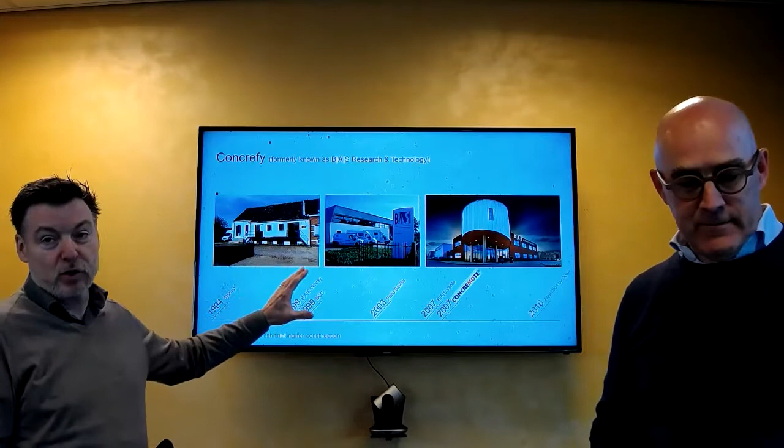Yeah, if you can zoom in. I'll zoom in the presentation. So in this overview, you can see the startup in 1994. I started with a very small lab. In 1999, it grew a bit bigger, and at that time already we had the most modern industrial lab in the Netherlands. And since 2007, we have our lab facility in Venlo. And at this time, now it's the most modern and largest practical lab in the Netherlands, you could say.

I have a small video tour that I would like to give you today, but now we do it virtually. So now you see our premises. This is how our customers and you could enter our building. As you can see here, we have about 3,000 square meters of lab facility. We are very practically organized.

And we have our control rooms where we see all kinds of sensor data coming to us on a global scale, many international projects being controlled by us. Of course, we have a dynamic team where we combine concrete technology, test results, and digital services.

Here you can see a small overview of what we do, all kinds of stuff related to raw materials, fresh concrete, hardened concrete, damage expertise, factory production control. We have all kinds of facilities to do research on all kinds of new concretes, like self-healing, self-compacting concrete, high strength, low strength, and we combine all these things, so testing, consult, and research and development on rebars, fiber concrete, and all kinds of types.

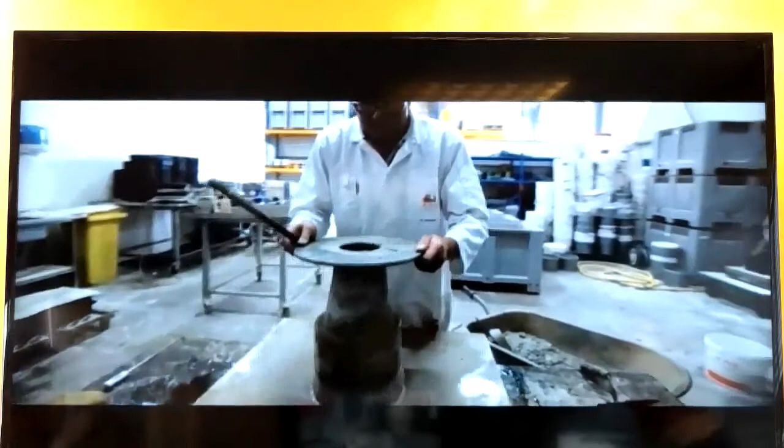And what you see here is an overview of not only concrete technology, but also new sensors. So we develop our own sensors and we connect it directly, as you see in this video, with our daily business and our daily consult and reporting.

And we also consult precasters and building sites. So what you see here is that our people with mobile labs go on site and they check all kinds of factory production control stuff. And we have also very modern test devices for high frequency pulsators, which we use for big dams, for earthquake testing on rebars and couplers.

So, any questions? Because now you've seen the lab, you've been there. We're going to elaborate on it, of course, but do you have any specific questions about what you've seen, or remarks to make? For me it's important that I know what you've seen.

So you see the video right now, there's a time lapse. Is the video just finished? No, we see you now. Okay, yeah, so there's a delay in the line, I guess. Let's see, there's a delay in the live stream, about 20 seconds later. What we see is you live, so we hear you live. Okay, and you see some, okay, well, no problem, we'll try to solve it in a few minutes. If I have a next video, there's only next. Yeah, because it works. But you see me live now. Yeah, we see you, that's one. Okay, this is what we see, great.

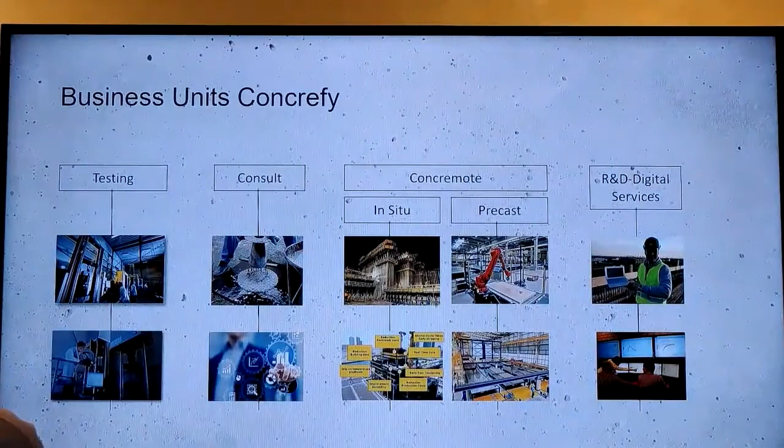Here you see how our company works. So we have different divisions, you could say. The first division is testing. We have an accredited lab in the Netherlands. Accreditation is the highest international standard, I would say, for lab facilities like ours. We have a consult department where our concrete technologists advise our customers, that can be contractors, producers, but also engineering companies and consultants.

And we have what we call a Concremote division. Concremote is real-time measurement with all kinds of new sensors. So we combine sensing and concrete technology, and that's what we call Concremote. Concrete, remote, Concremote. You will hear that much more later on, at least we hope.

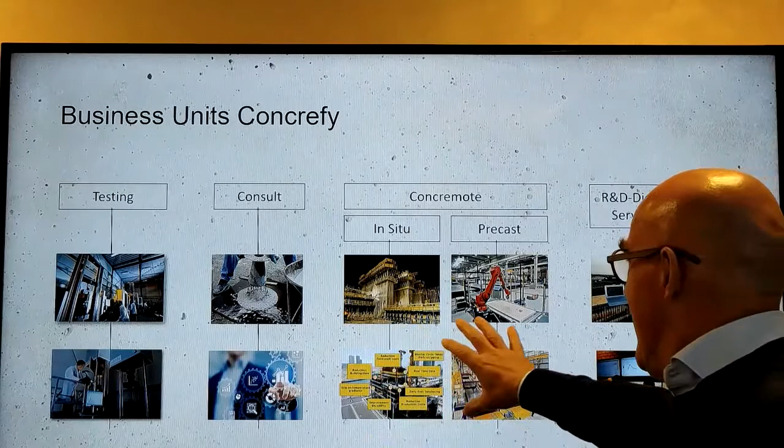Maybe a bit slower than I thought, but so our strategy, our philosophy is that we have sensors on site so that we have real-time information on these building sites and we can help our customer in real time, and he has all kinds of data also available, because that's a problem in our industry. It's quite traditional, old-fashioned, you could say, but we need to industrialize. Our productivity in the industry is very low, it's poor if you relate it to other industries like chemical, food industry, and that kind of stuff.

So that's where, if you connect it to automotive, we have a big problem, you could say. And we think that digitization, internet, industrial Internet of Things, sensing, remote technology, digital services is the solution to bring our smart technology to the industry. So that's what we do here, and we think that the precast industry reflects the industry on site of tomorrow.

If you introduce new technology in the precast industry, then you can export it to the sites. In precast surroundings, you produce under good conditions. You can optimize your production, and I think that in 15 years a production site looks more or less the same as a precast plant today.

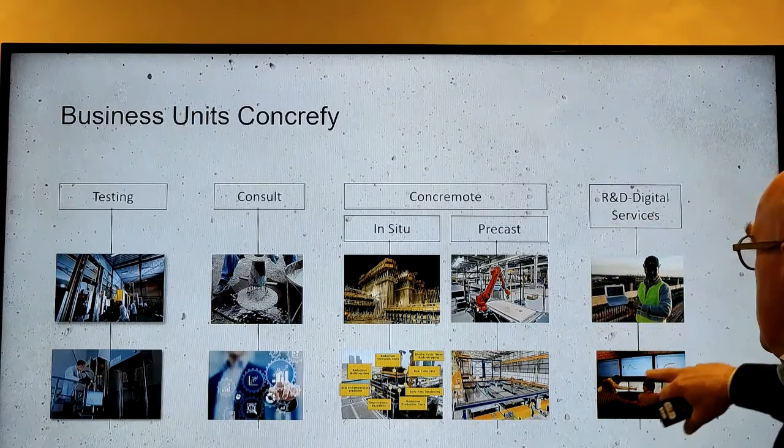And to develop that, we have a department, R&D and digital services. Our R&D people focus very much on the combination of digital services and concrete technology. So here you see the departments and their focuses: research and development, forensic engineering, applied concrete technology, and remote sensing.

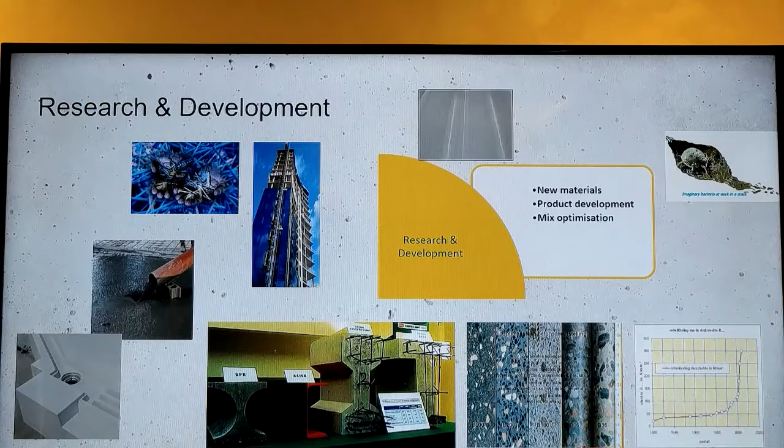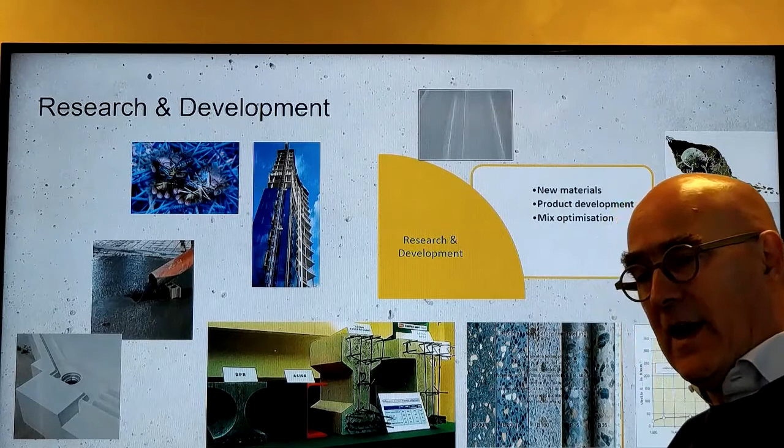If I show you some examples, we focus very much on compressive strength, optimization of the strength, high strength concrete, self-compacting concrete. In the end, we try to help the consultants to reduce the volume of their structures, so that you should be able to produce a concrete beam in the profile of a steel beam. Because if you look at the goals of today, reduction of energy and CO2 is also connected to more intelligent engineering: smaller structures, less rebars, high performance concrete, and process optimization so that you have exactly the right strength, nothing more, nothing less.

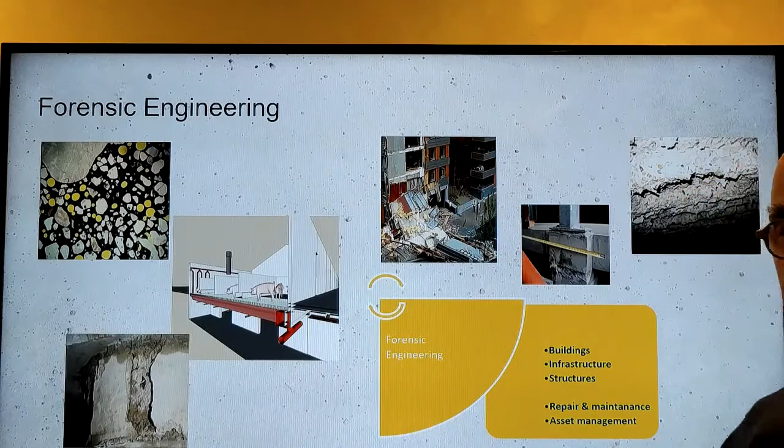Industrialization - we focus very much on that in our R&D. If you look at our forensic department, due to our technology and knowledge of what's happening in the industry, people ask us to help them, to consult them on damages. And we use that experience to improve materials and processes.

So we connect it to our daily business. This is what you see, what we do in normal daily practice. Here you see self-compacting concrete, but we have implemented it about 22 years ago already in about 20 factories in the Netherlands. And today, 70% of our precasters work according to self-compacting concrete procedures, and that's very good on an international scale.

So we are very - you mean we in the Netherlands? We in the Netherlands. So the Dutch industry is very well developed regarding self-compacting concrete. And if you go to Germany, only 4 kilometers away here from Venlo, nobody does it, at least just a few. So cultural stuff, cultures in countries, are very important in whether they adopt, adapt and improve this kind of technology.

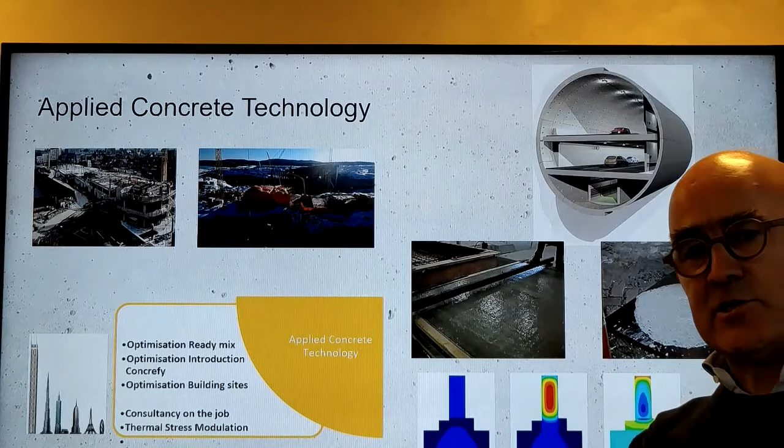The Dutch people in our culture are quite open for new innovations, and as soon as we have a certain understanding of it and some trust in it, we immediately implement it in the industry and just learn by doing. In Germany, people focus on standardization, all kinds of procedures, and then they start to implement. But as you can see with self-compacting concrete, it can last for more than 20 years, and that does not fit in our modern philosophy regarding innovation.

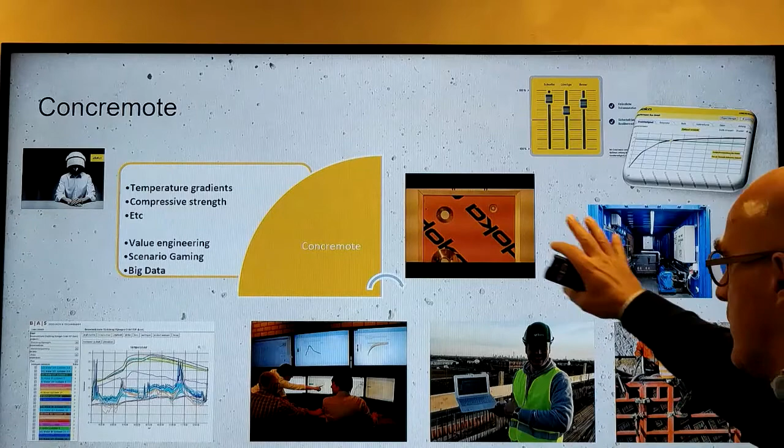Concremote, as I said, is the combination of daily practice, concrete technology, and real-time data. Having the data means that you have control, and that means that you have at least the opportunity to improve.

And that's more or less our company. So then you ask me, how do we? Well, then I first ask everybody who's looking at us, if you have any questions, are you still with us? And it's understandable if you don't want to speak up in this group. We are still here, I have a question. Yeah, that's a good start.

So I understand that you do all the testing, you do the consulting, and you help contractors with projects. That I understand, because you can immediately send an invoice to them. But how do you organize the developments? Because that's a challenge, I think, for the new developments - who is going to pay for that? Because that's you have to do on your own.

It's one of my goals for today, because most of the people are quite young and in the beginning of their career, still theoretically oriented. I started like that too, of course, 26 or 30 years ago. But it's my goal for this company to improve our industry, to make it better, faster, cheaper, with a higher standard, to improve society, etc. But it's quite difficult in our industry because everybody in the R&D sector is focusing on quite reactive responses to the industry.

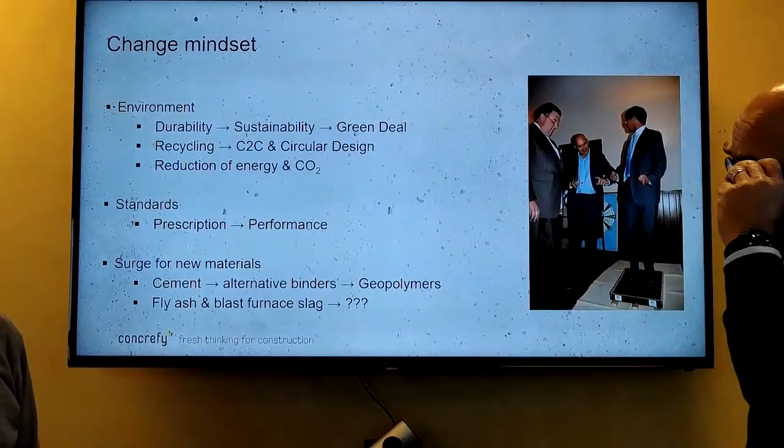There are some important changes going on in the mindset. If you look at the environmental paragraph, we don't talk about durability anymore. We focus on sustainability and even green deals on a global scale. And that's the higher goal, I would say. We don't talk about recycling, we talk about cradle to cradle and circular design. And we try to reduce energy and CO2.

This month in November, the Concrete Society organizes a concrete event on a digital standard, and we have four topics: circular design, urbanization, CO2 reduction, and energy reduction. That is really important to our industry.

But to go into this innovation, we must adopt prescription to performance. So it doesn't matter how many kilograms of cement, sand, or gravel you use, or how your mix looks like. What is really important is what the performance is for the customer. And that is my career, and that is what Concrefy focuses on.

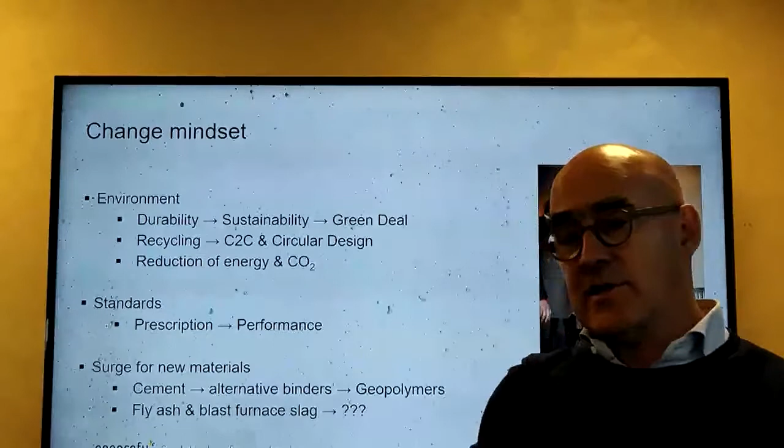Of course, we do research together with universities, and we try to collaborate with them. But we focus very much on the transition to applied technology to make sure that my customer has a certain performance. And that's where the combination between our people and you can be very dynamic for the future.

I think that we have to go to open source collaboration on these kinds of new topics. And in the industry, some companies are already doing this, like Voorbijbeton, Van Wijnen, who are customers of ours. They really want to open this up, like we did 20 years ago with self-compacting concrete, with people and companies working together. And we have to look for new materials.

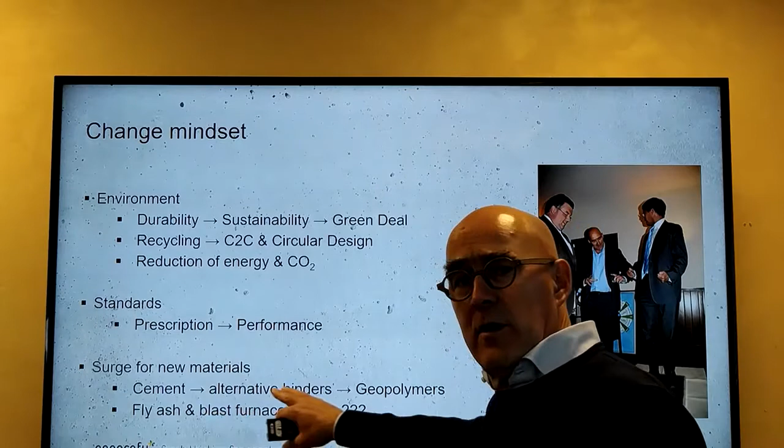Cementitious materials, I think we have to change that. So we have to go to alternative binders, like we discussed today, geopolymers for instance. But we have a problem on the way up, because we will have less fly ash, less quality of fly ash, and also less blast furnace slag cement, because the other industries are also improving. So we have to be very creative in the future to develop all kinds of solutions.

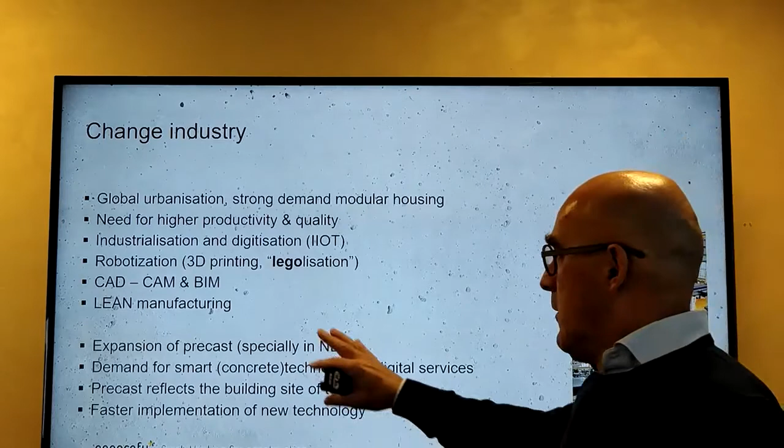And our industry is changing. That means we will have global urbanization. We need higher productivity, a higher standard of industrialization, CAD/CAM and BIM. Our precast industry will expand on a global scale very fast, because that will be the standard for the future. If you want to develop pricing, productivity, and speed, then you really need to go to precast. So there's also a very high demand for smart technology combined with digital services.

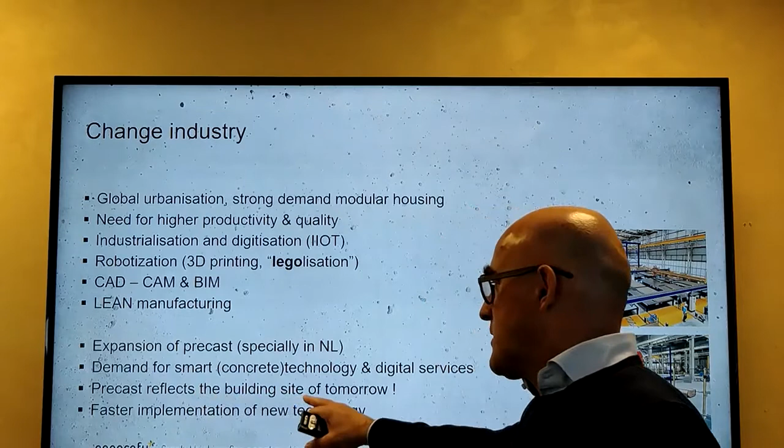And that's where we focus, and that's where we need intelligent people and research to make that happen. Because, as I said, precast reflects the building site of tomorrow. And we think that you can no longer focus on standards, because they are based on historical technology.

We have to implement in a new way, like design by testing. And that's where our lab comes in. If you really want to focus on design by testing, universities like TU Delft and Eric with his staff, we have to focus on new implementation, learning by doing, you could say. So that's Dutch style, and it has to be faster, of course, than it used to be.

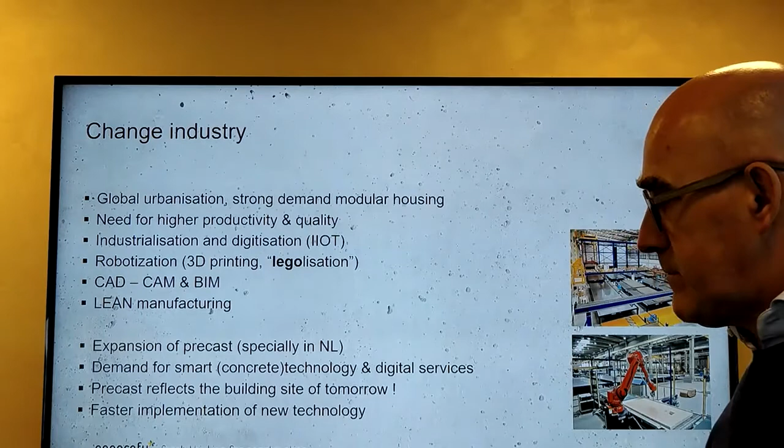The development time that we had 20 years ago is no longer there. Every year you get a new smartphone, new developments. Implementation of new technologies goes faster and faster, so you can't wait until standards are changed. Doesn't work anymore. My personal idea is that if you look at European and international standardization, I see more or less a standstill coming.

People, companies no longer want to spend their precious time in procedures that last for 10 years to come up with a new standard. It doesn't make sense, because our economy develops much faster. The way you as students absorb all kinds of new technologies, the speed, the acceleration with which you can generate new technology, it doesn't fit in standardization.

So I would say forget standardization, trust yourself, trust your new technology, and try to convince people on a scientific way, of course, of the added value.

Well, you asked for my vision. That's our reason for existence, you could say, our raison d'être in French. So we want to be the concrete specialist as a company, but then in a modern way. The specialist does not mean that I have to know everything about concrete. No, I have to come up with a solution for our customer so that he has a partner, an institute that can help, maybe in collaboration with you, with the university. That's this open source society.

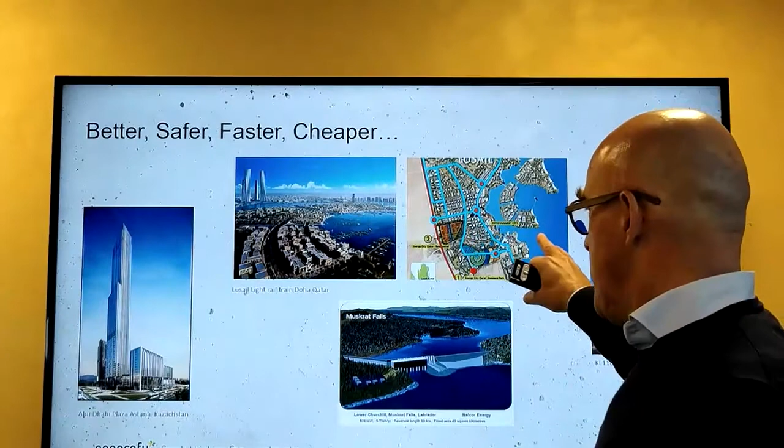And what do we want to achieve? Better, safer, faster, cheaper. You can see here on large projects where we have worked, and we use high standardized concrete technology with real-time measurements to make these kinds of projects happen, and more creative.

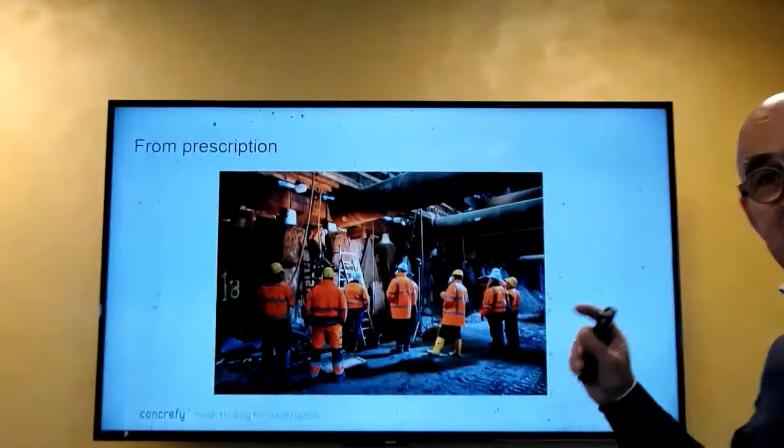I can tell you something about practical solutions, because this is how our industry looks like today. This is a picture of the North-South line, a tunnel project in Amsterdam, only 4 kilometers long. But you see here how the daily business on site works.

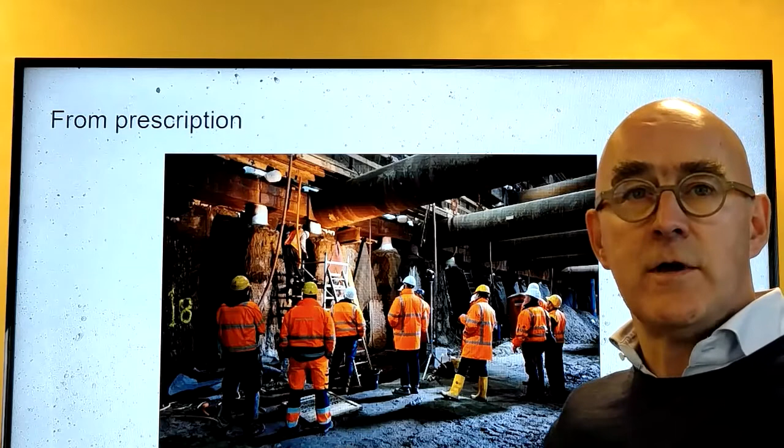There's one guy working, and 10 or 11 people with their hands in their pockets are just looking. Nobody collects data - it's all practically oriented. They go home at the end of the day, and nobody has learned, nobody has improved. The company doesn't have a system or data collected, and they don't have as-built information. So if, after 5 years, you would like to know what happened there, nobody can tell you. That's a big problem in the industry - a lack of digitization.

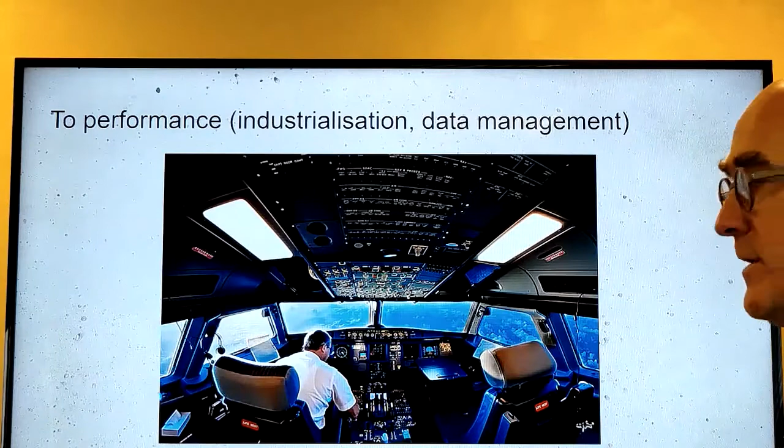So this is where we are heading, and this is our approach. This is how we see the industry in a few years - just one guy having all kinds of sensing devices and machinery available to improve. And we started with this idea.

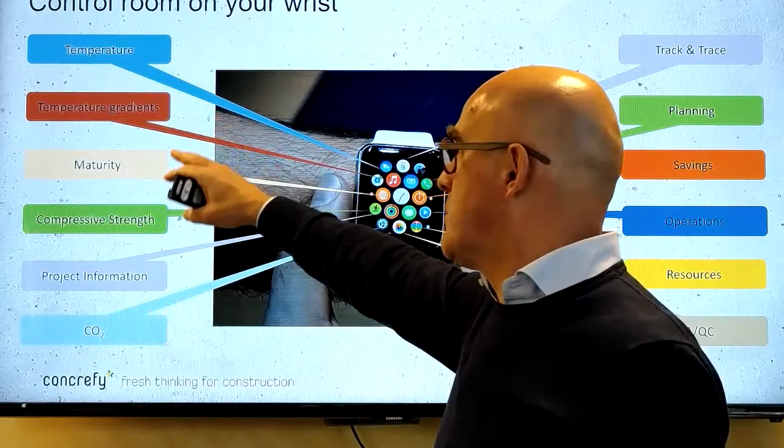So in fact, on a watch on your wrist, you should have an overview of what's happening on site. At one glance, you should have an overview of temperature gradients, maturity, compressive strength, project information, CO2 production, track and trace, your planning, your savings, operational stuff, your resources, and your quality assessment and quality control. We have this technology available because you have all kinds of sensors. IT guys can help you build a decision support tool, as Dr. Blagiewicz calls it - it's just a portal to have all your information on it.

This is the way to control smart concrete in the future, also for repair or self-healing. In fact, on your wrist you should see how your self-healing agent works in practice, so we have to work on that kind of stuff. I think that if we do not develop this kind of technology, concrete will be a material of the past and will not help our society improve in intelligent cities, infrastructure, and buildings.

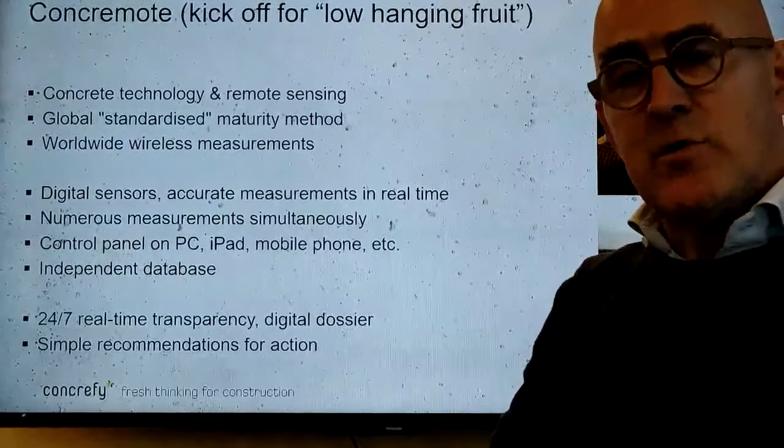I'll go very fast through this one because it's a lot of text, but we started implementing remote sensing in the concrete industry by measuring compressive strength on a global scale in every standard - ASTM, British standard, EN, national standards like the Belgian BENOR and Kiwa. Everywhere you see people focus on the 28-day strength; it's in every standard. But it doesn't make sense, because in the last 2,000 years we've learned that the concrete strength is maybe already at the right target after 2 or 3 days.

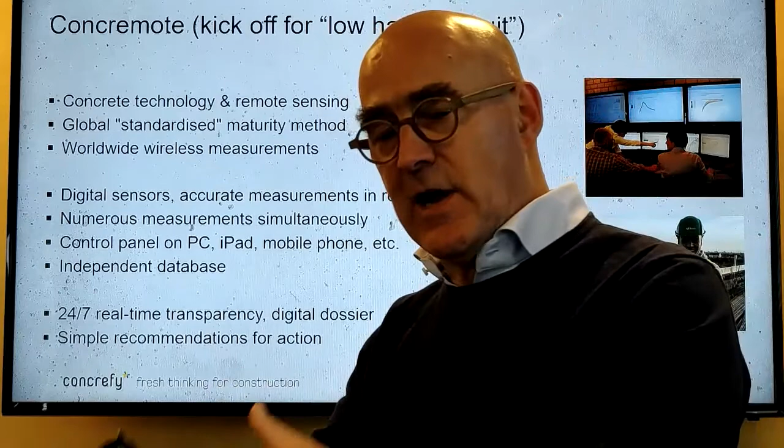So it doesn't make sense to press cubes, because a cube only tells you what the potential strength would be under a certain environment, like water at 20 degrees Celsius. It doesn't make sense. You really have to know what's happening on site, how the structure feels. And the structure can tell you how it feels by sensing—how many cracks there are, or how many cracks have already been repaired through self-healing. Andrea Blagiewicz will tell you more about the sensors we've developed for during service life.

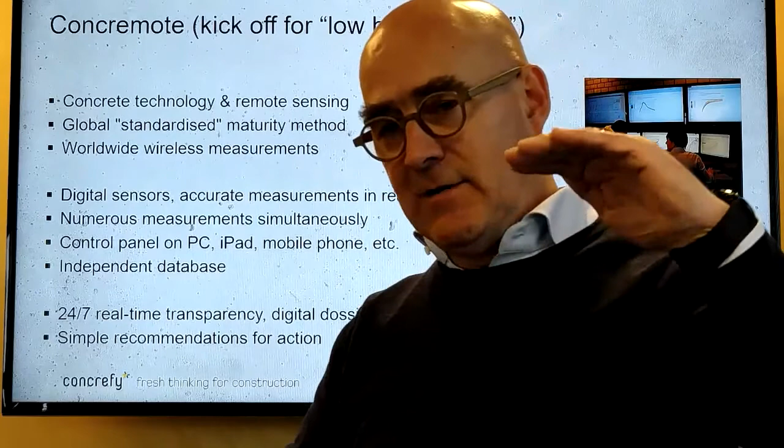But this is where we are focusing. We just started with concrete strength because I know that's the low-hanging fruit for the industry. As soon as we've convinced the industry to adopt this kind of technology, we can take the next step. Coming up with all kinds of smart sensors doesn't make sense yet, because our partners, our clients, aren't that far along. You always have to consider how your customer, your potential user, feels, and whether they're already at the right level to adopt, adapt, and improve.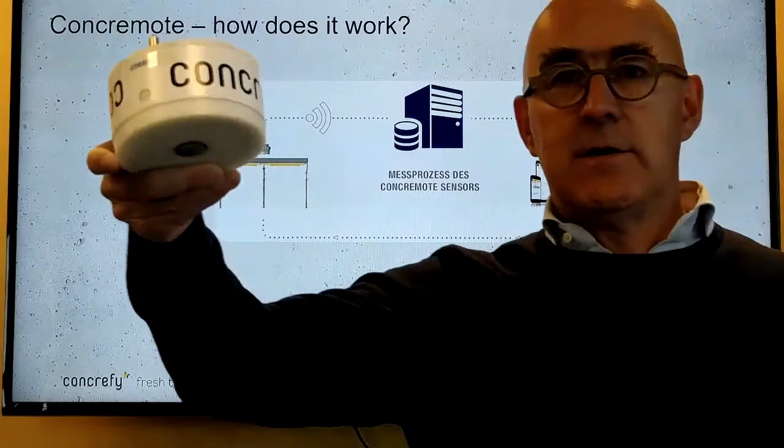Concremote—how does it work? We built a system where you can use a sensor. Here you see a sensor. This is just the size of it. It looks like a teapot. You put it on the surface of the concrete, and immediately you have real-time information.

As fast as I do it now, you put the sensor on the surface, and immediately it tells you, hey, this is concrete, and this is the right strength, and it keeps informing you. At the right moment, it says, hey, you're ready—you can go to the next level, or the next story in your building, or the next phase in your bridge, whatever. So this is just a simple sensor, no buttons, no lights, and it helps you on a very intelligent level deal with your structure.

So you put the sensor on the surface, and like with your cell phone, the signal comes to your computer or your handy, helping you improve.

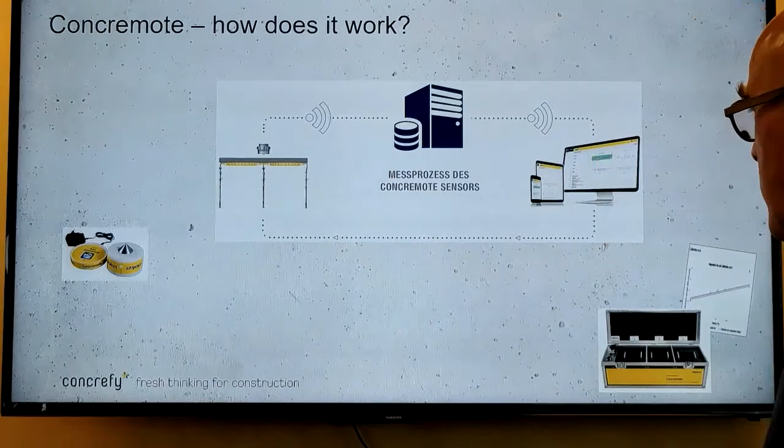The only thing we have to overcome in the beginning is that we need a calibration. So once, when you start, you pour 5 cubes, you press them after a certain time, and during this period of 5 days we monitor the strength development and connect it to the real strength. That's it—you create a fingerprint of your mix. It only costs you 5 hours over a time span of 5 days. That's it, and it's based on this principle.

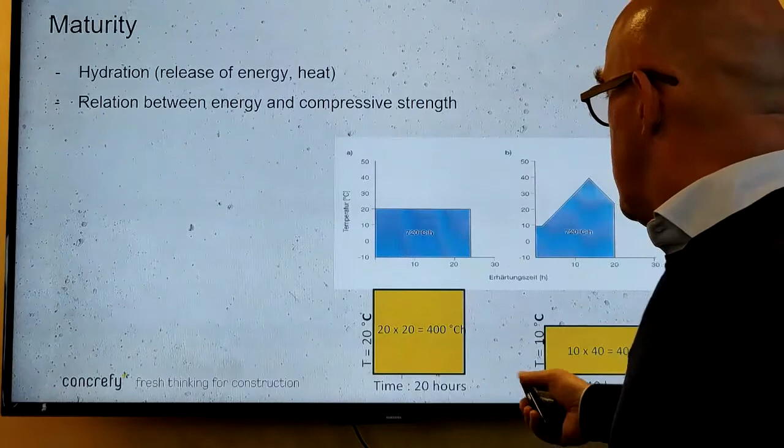Here you see very fast how maturity looks. If you have a certain concrete mix, and the hardening process runs for 10 hours at 10 degrees, 10 times 10 is 100 degrees Celsius hour. It's the same as if you do it 5 hours at 20 degrees. That's the principle behind it.

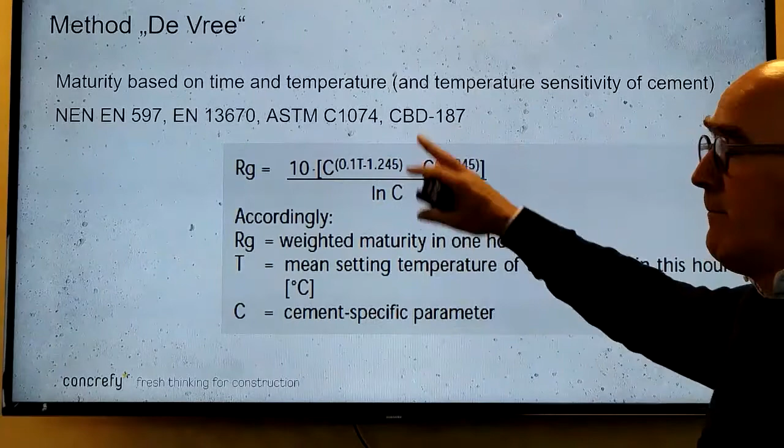There's a more intelligent way of doing it, the method De Vree, but this method is in every standard, ASTM, British standard. So we looked for global acceptance of this methodology, and it's already in every standard, but until today not too many people have digitalized this. We started this 13 years ago, and we are market leader on a global scale just by putting old-fashioned stuff into a new system.

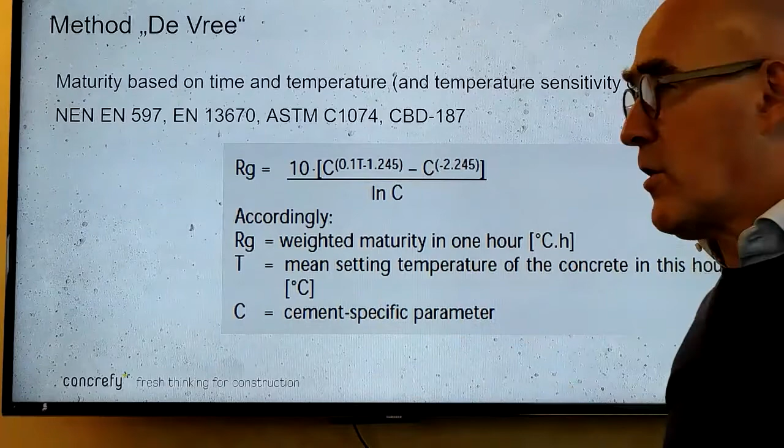And this is what, if you're looking for self-healing structures, you have to do the same—you have to monitor it, you have to be sure it works. You can do that with all kinds of algorithms, knowing your material. What you see here is that the C value of a cement is very important for that methodology. If you really want to know the potential of a structure and what the temperature development is, you have to know what the materials look like.

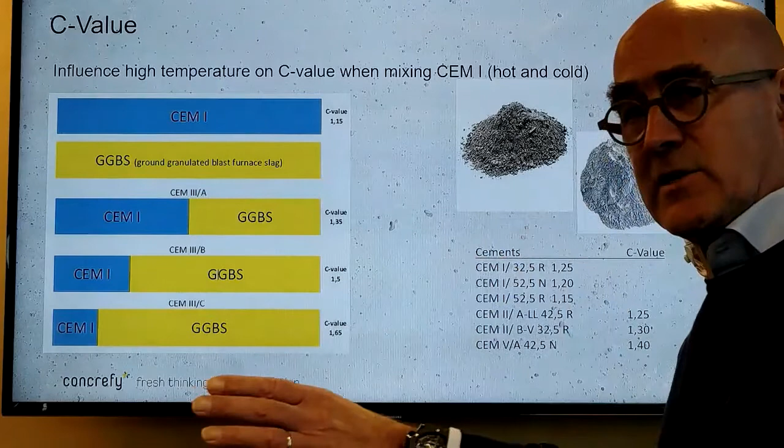Here you see CEM I, GGBS, or combinations. In fact, that means that, depending on the materials, you will have a certain C value between 1.25 and 1.4. So as soon as you know what kind of material there is, you have a certain mix, and once you've calibrated the mix, you have the fingerprint for this kind of measuring. And I'm sure that also in regard to self-healing, there will be such a relation somewhere.

So as soon as you have the relation, you put a sensor in, you can help your customer build up the trust in this new technology.

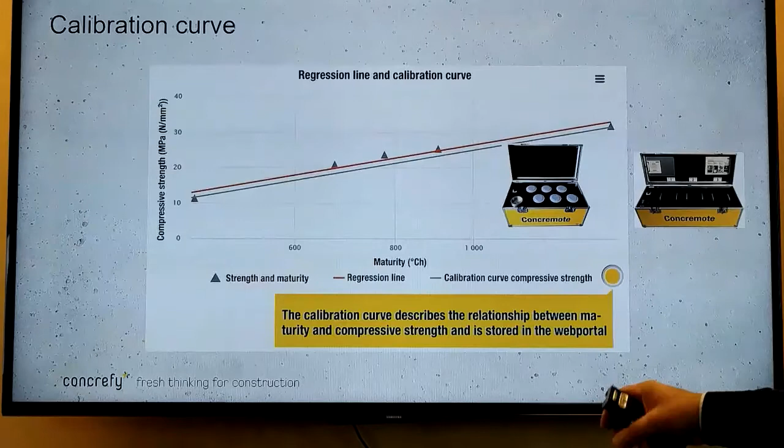This is how this calibration works. We have developed new calibration boxes. We send a box to the customer, they fill it, they press the cubes. Five days later, you have this calibration curve, and that's what we call the fingerprint. As soon as you have this fingerprint, you see the maturity, temperature gradients, and the compressive strength.

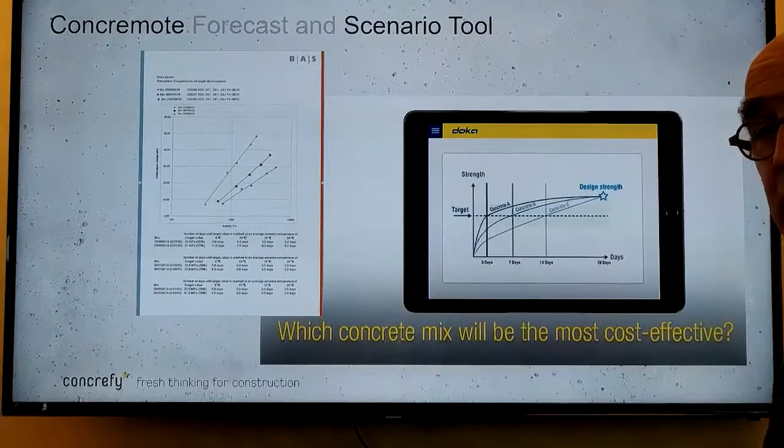And that's really interesting. So real time, people can monitor their structure, can monitor the performance. What you also can do immediately is if you have three types of concrete, A, B, C, a fast one, a slow one, or one in between, you can evaluate what to do on site. Do I need a mix that helps me in 3 days, 7, or 14 days?

Knowing that on a global scale, in 100% of the cases, concrete is too strong, the compressive strength is too high, 100%. So due to the lack of digitization, process control, quality assessment, we don't even know what's happening on site, and we focus on the wrong numbers.

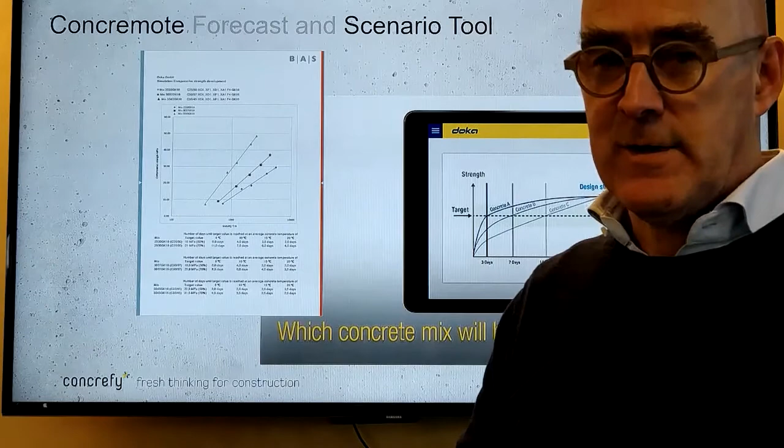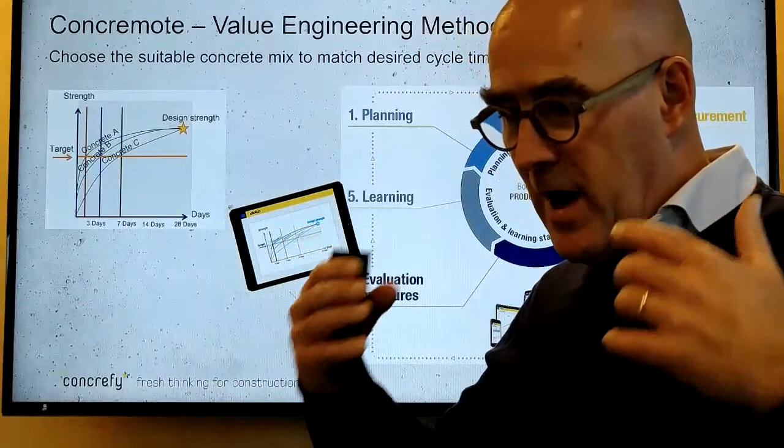Because when you have a high strength, that does not mean that it's improving your structure. Then it's even more brittle than ductile. And I would like to have a ductile material that is flexible and not a brittle one. Also bear in mind that when it's too strong, it's also too expensive, and the CO2 footprint is too high. So what we focus on is use your mindset, look at the industry.

We use a lot of cement, we use a lot of materials. We have to use less cement of a higher quality. We have to engineer structures with less volume of concrete, so the thickness of floors, beams, walls, whatever, it has to be a bit more tiny. Use less rebars, put it on smart locations, and measure continuously from beginning to the end.

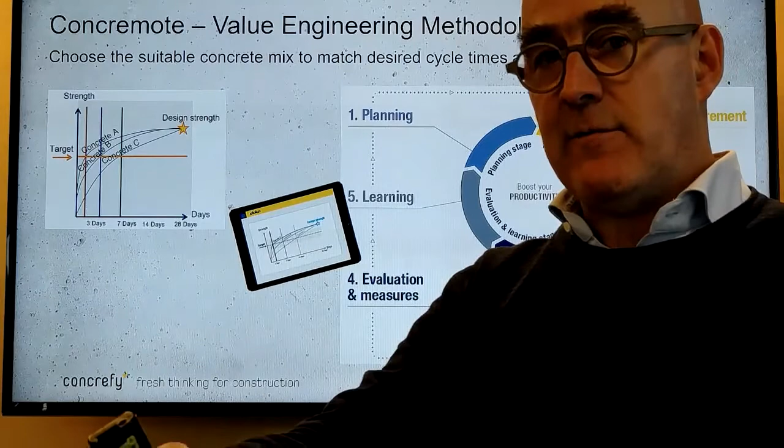And I will tell you now something about the measurements during construction. In half an hour, Andrea will tell you how we can measure during service life. That could also be a possibility, quite open to you, to be used to monitor self-healing structures, repair, that kind of stuff. We have already had some contacts with industries who focus on repair works and repair materials, because they are interested to use such a device and technology and decision support tool to improve their solutions.

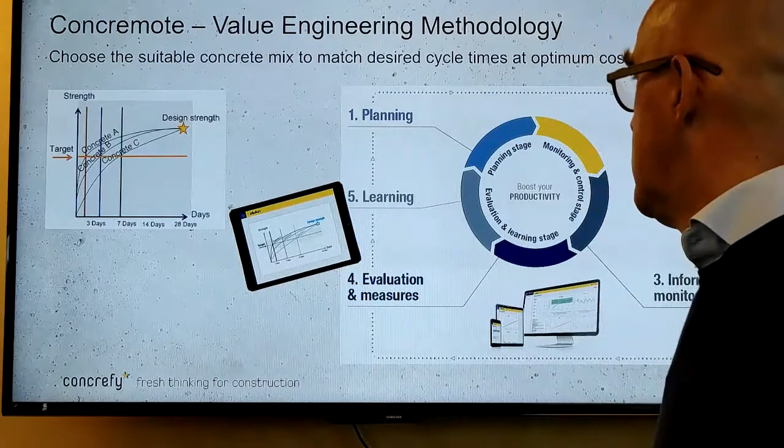And here you can see, yes, it's indeed a very good point. So your main focus now is on the compressive strength and the development of the compressive strength to monitor that. And indeed, in the SMARTINCS project, there are 15 PhDs working on different topics, and one of them, Gabriele, he's in Cambridge. He will also work on sensing of damage and the disappearance of damage, how they heal again.

So is that something you think is also an important aspect, that you really sense cracking and how that changes the behavior? It's necessary, because times have changed. In the past, if you were focusing on a new mix design or a new material, you just did some tests according to the standards, and everybody felt happy with it.

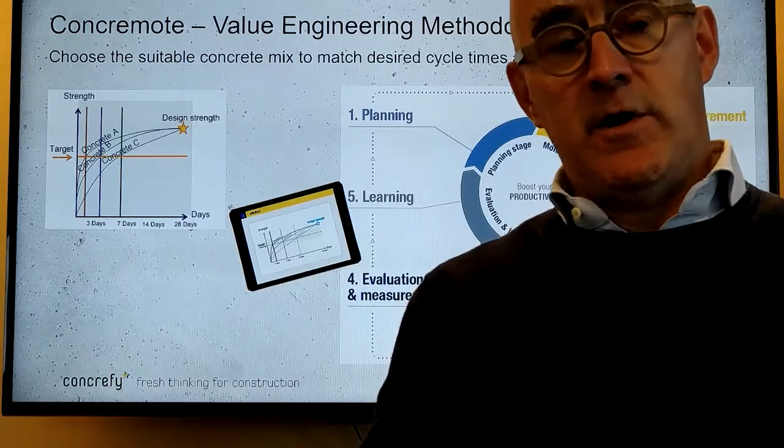But first of all, it took a lot of money and time and energy to put all these tests out. Then it took a lot of time to get it into the standards or into the procedures. Afterwards, you can start convincing people, but it just takes too much time. And we don't, in our society, have that opportunity, or we cannot be too reluctant on that. It doesn't work anymore.

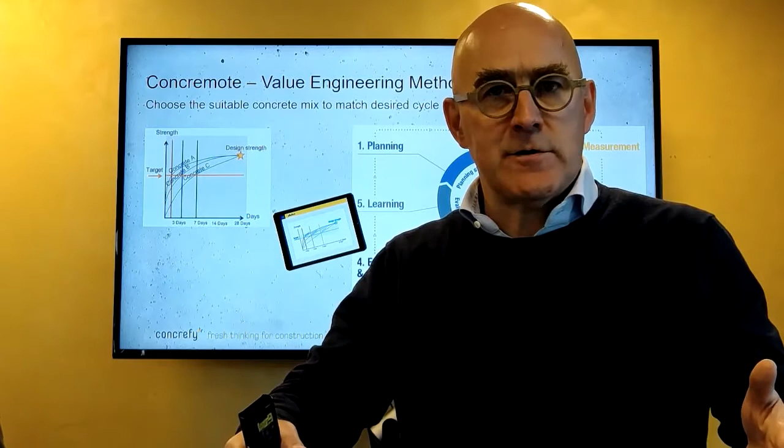So as soon as you have a new solution, put sensors in it and learn by doing. And that's your new approach of R&D, I would say. It should be connected to sensing. So if your colleague is working on that, I'm open to start discussing this with him, and maybe we can help each other to improve this.

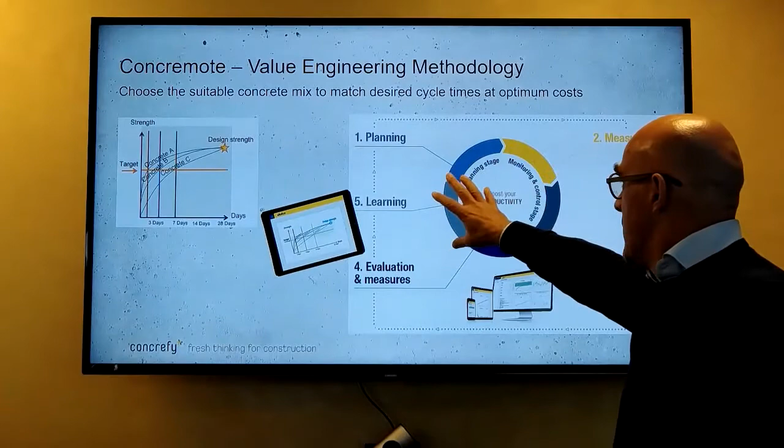Yeah, sure. Because then this happens, you see, okay, first of all, I have a certain planning in my industry. As soon as I start measuring, like we just discussed, I have these measurement results, I have all the information, and I can monitor the solution, the self-healing agent or the compressive strength or whatever. And then I can evaluate and measure and learn.

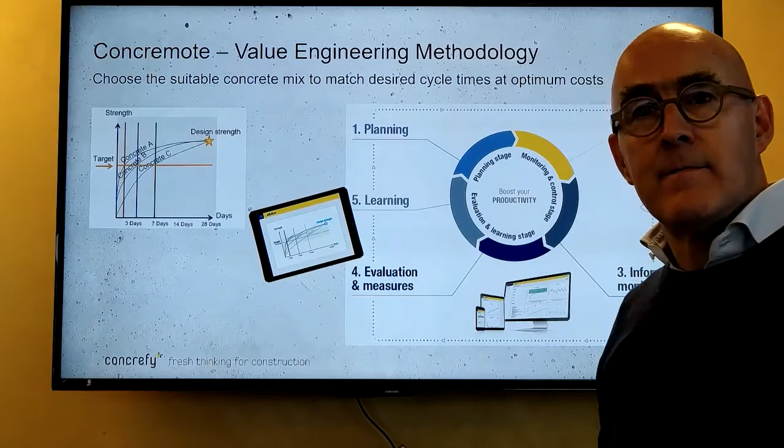This is a cycle we have to approach in a new way. Every industry has continuous improvement, but it's always based on data. The construction industry oftentimes doesn't have the data, and thus no continuous improvement, and that's why they lag behind hugely.

So this is our marketing strategy: you should have all the benefits on your wrist. Doesn't matter if it's temperature, CO2, energy, or propagation of self-healing, you should have it on your wrist. Make sure you focus on this digital agenda as soon as possible, because then the user, the client or the customer can save time, increase safety, enhance concrete quality, and reduce costs.

In the building industry, if you look at the financial daily times in the Netherlands, the Financieel Dagblad, you can see that nearly every contractor has problems to survive. Their productivity is low, and the failure costs are a multiplier of what their EBIT is on a daily scale. So really, our building industry has to develop.

The opportunities in construction are huge, because normally when you have these 4 KPIs, if you want to enhance one of them, you're going to sacrifice one of the other ones. In the concrete industry, you still have room to enhance all of them without having to sacrifice one. Big opportunity.

This was more or less the vision. Now, how are we going to do this? You said before, the precast industry is more or less what you see now. You will see that in 10, 15 years time in the construction on-site industry. Where are we with these solutions in the precast industry?

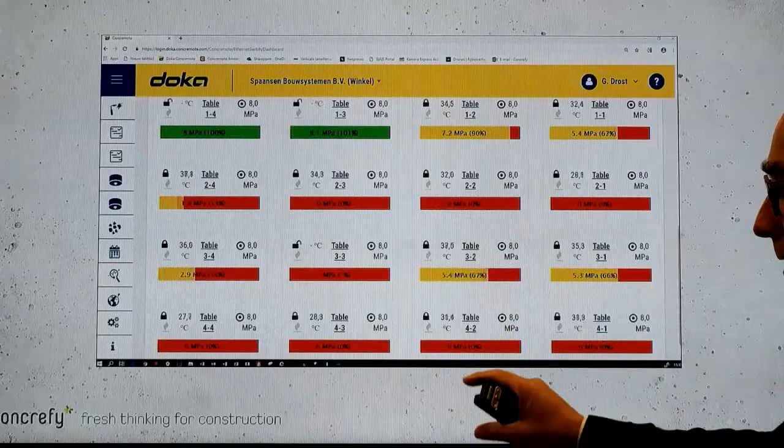Just somebody puts a sensor on the surface in a precast plant. Immediately, the heating starts, and management sees the development immediately. This is digitization, industrialization of a precast plant. Then, when the strength is okay, it stops, and you can take out the element.

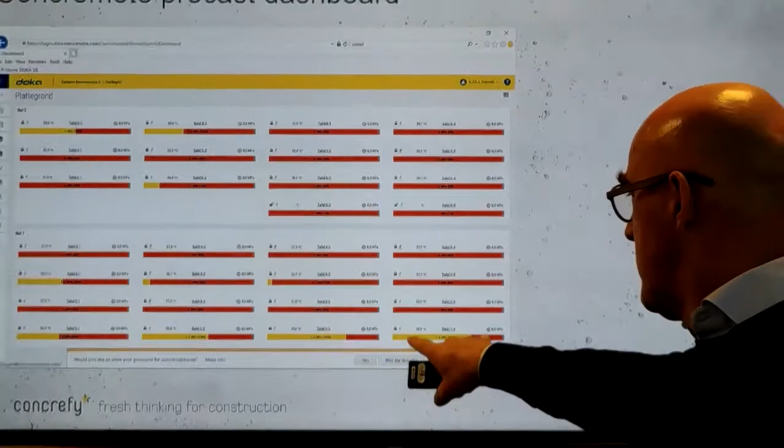This is what you just saw - this is the overview of the plant. Make sure you note every beam here is 35 meters long, so this is a very large factory. Immediately when this sensor starts, it opens or closes the formwork, starts the heating, and after a certain time it shuts down the heating and measures the strength.

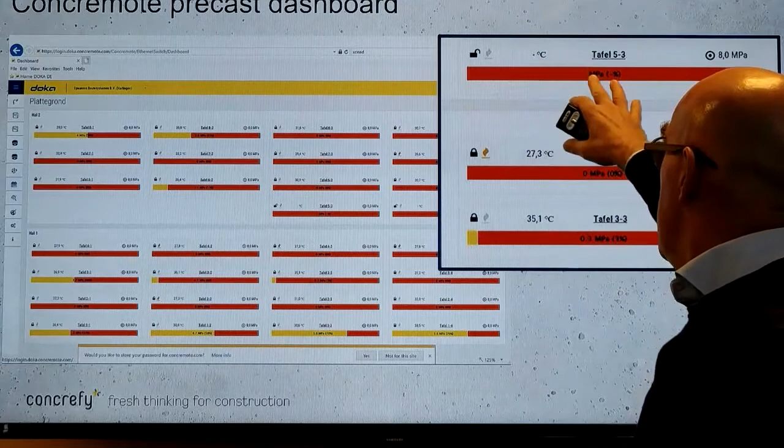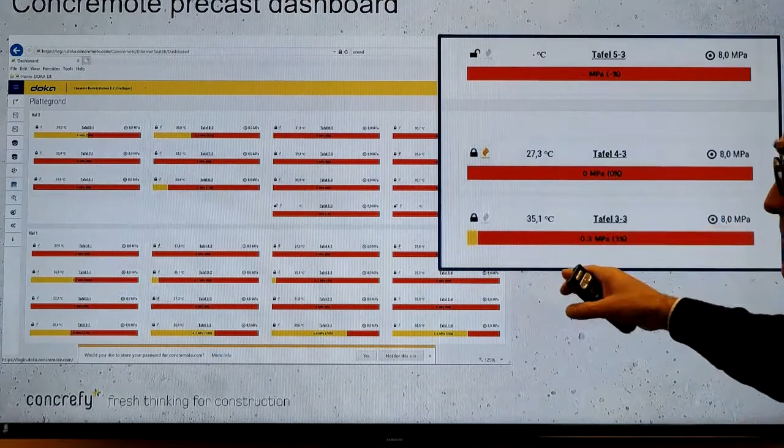So here, position 1 is open, no strength, no temperature. Then you close down the formwork, put the heating on, and have a certain temperature. There's no strength yet, but after some time the heating goes off and immediately you have some strength, 0.3 MPa. After some time, at 8 megapascal, you can de-shutter, take out the element, and produce 2 or 3 times a day.

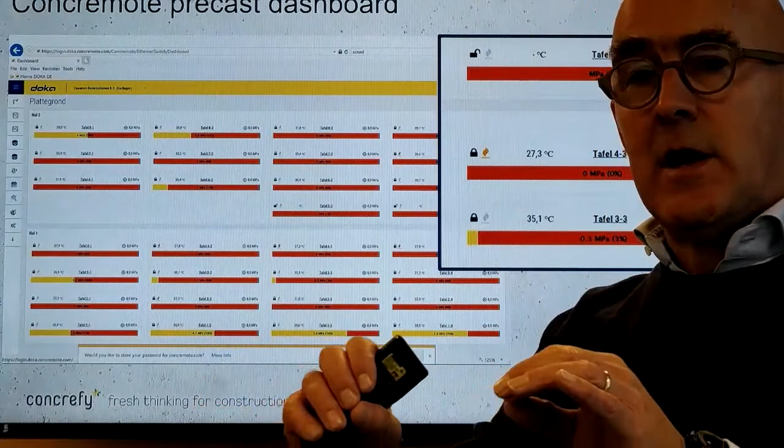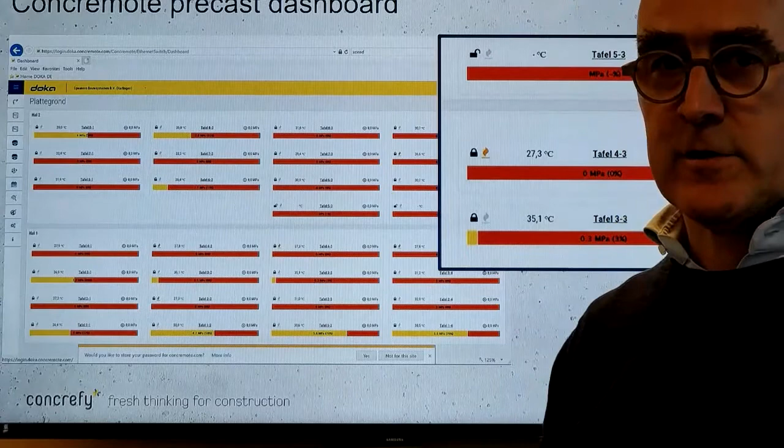So this is what we're focusing on - having the right mix and controlling the production to make sure you have the same quality every day, no cracks, no problems, using the right amount of energy, and you cannot open the formwork manually anymore. This is digitalized so that your risk and failure costs are low, and it's safe for your people to work. By doing the things you normally do in a smarter way, you get a lot of improvements for your people, your product, your customer, and society - reducing energy cost, CO2 production, material loss, etc.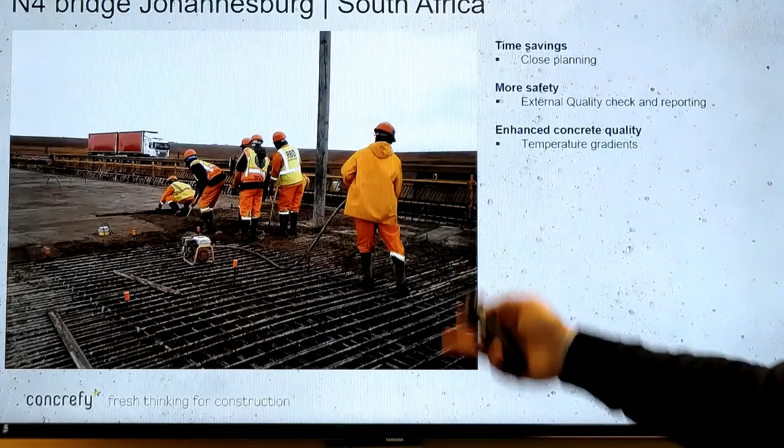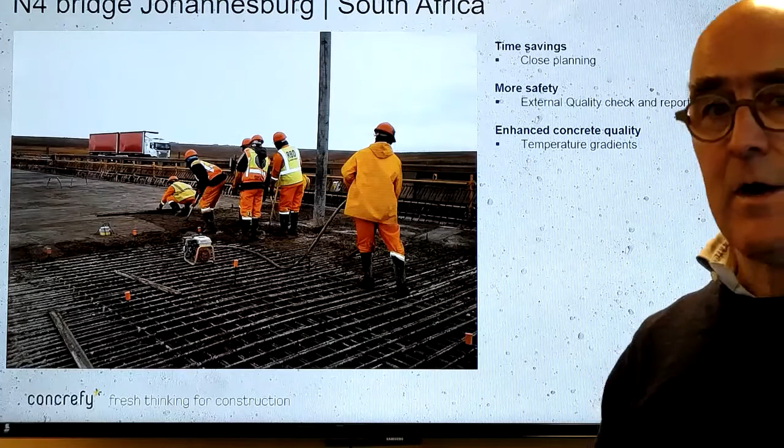So you have blue and white collar workers, you could say. These guys are focusing on the process, and the sensor helps them by giving a red light going to green - hey guys, you're ready for the next phase. But at the same time, with the same information, somebody at the head office sees all the real data coming and knows how to control or improve the process from a distance.

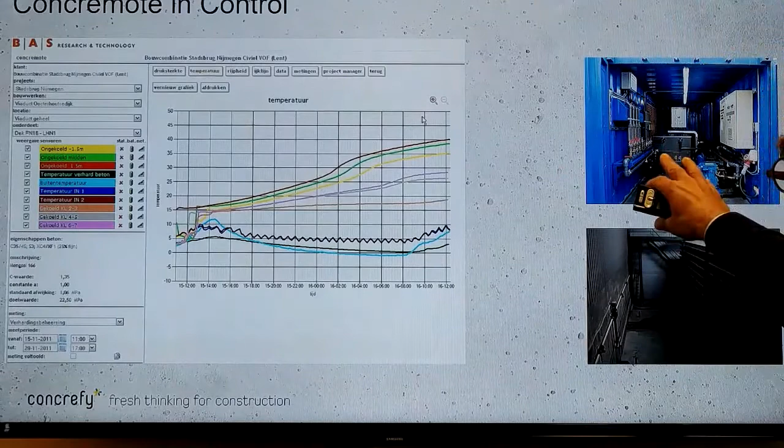We can even put cooling or heating machines on it, so for mass concrete, if you measure the temperature in the concrete, we can speed up or slow down the heating by putting warm or cold water in polyethylene pipes in the structure. So we have a container with a heating and cooling machine in it. We control the concrete on site, and our system with these sensors controls the container, making sure the structure has the right temperature and strength development at the right moment, and the de-shuttering process takes place in the right follow-up.

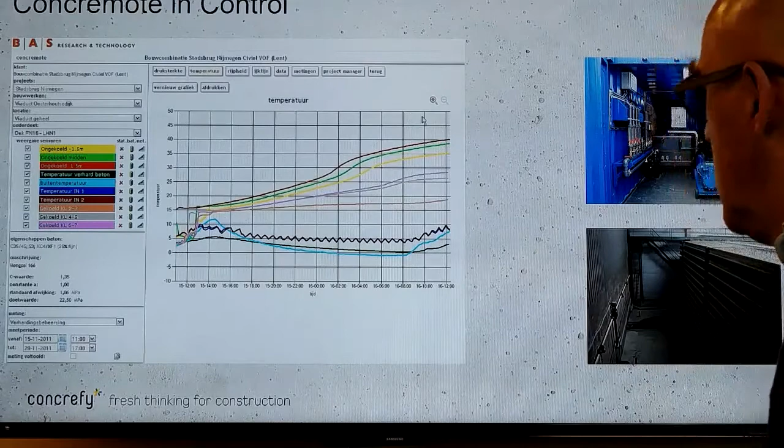Some examples - this is Tottenham Hotspur's football stadium. We put some sensors in it. We reduced time, we have more safety and more quality control. Here you can see the example related to concrete technology.

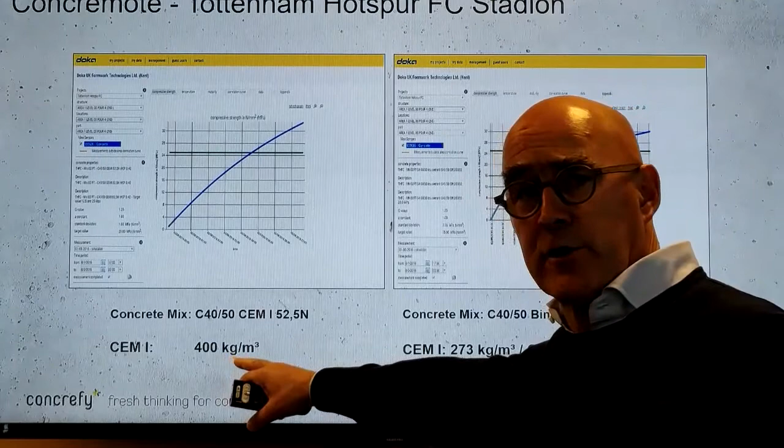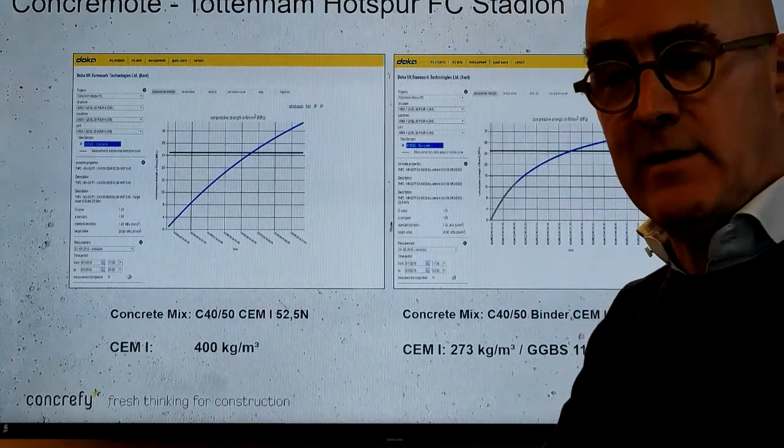They started with a concrete mix with 400 kilograms CEM I per cubic meter. We optimized it, and in the end we changed their mix design, and measured so that it has exactly the right strength at the right moment, and reduced the cement to 273 kilograms and put some GGBS in it. By measuring with these real-time sensors, we were able to help them in this optimization - just doing the same as ever, only in a smart way, saving money, time, and having better results.

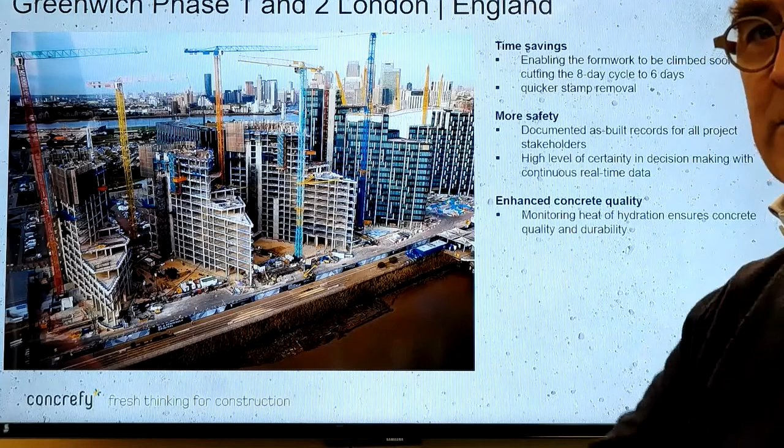give our intelligent concrete solutions to our customers so that they can improve, and that helps us, as Eric asked me before, to pay for my own internal R&D. So we try to earn money to make that happen. It's not easy, eh? I have a continuous lack of money over the last 26 years.

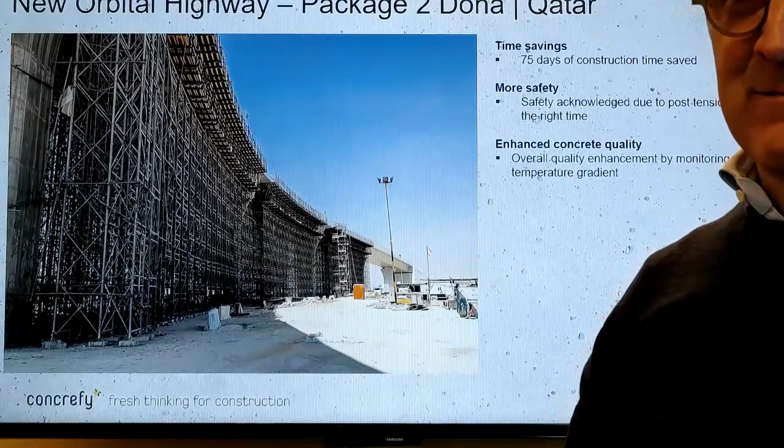This is, for instance, a highway in Doha, Qatar, and we saved on this structure 75 days. Then you talk about a few millions, eh? That's a lot of money. Tunnels - this is a dam in Canada where we put 1,000 sensors in it, only to improve.

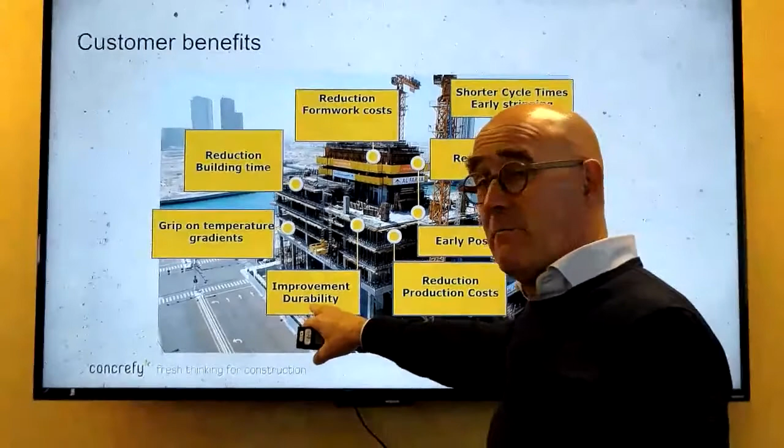So what are the customer benefits? Reduction of formwork costs - we are quicker. We have real-time data, early post-tensioning, so it's also safer. Reduction of production costs, improving durability, because with a smart mix you're more durable. We have grip on temperature gradients, so fewer cracks on site, and we have reduction of building time.

Just on a higher abstract level, think about how this methodology or principle could help you with repair methodology or self-healing agents or whatever. It's the same, you know - it doesn't matter if you look at temperature, strength, or crack repair. It's the same principle, huh?

Okay, good. Everybody still with us? Yeah, any questions? I see some.

If I understand it correctly, Toine, these sensors actually replace those 10 workers, the 10 people with hands in the pocket at the north-south line. So you don't need them anymore. So it should go much faster the next time they build a metro line.

We prove this. We do this on a daily basis on the largest project in the world. We are working with Doka, a global company, one of the two biggest formwork producers in the world, Doka and PERI. We work for Doka and implement our system on key and large-scale projects - dams, electricity plants, power plants, bridges, tunnels, high-rise. Multi-billion projects where we are in just to help them.

And it's just based on a simple principle. We try to be the best in concrete technology. We adopt, adapt, and improve digital technology and sensors and put it together, and then you can be successful. So if you would like to implement new technology in the industry in the next few decades, I think it's our conviction that this is the solution to help you, because if you prove to the client that you're successful, they are willing to buy.

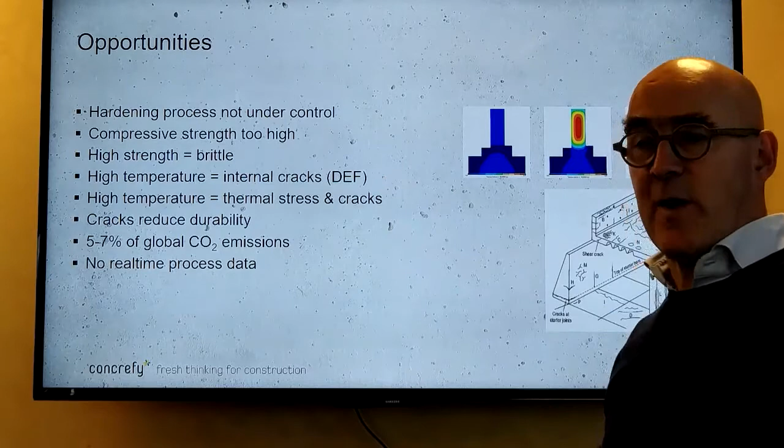And we can solve that by using sensors. As I said, the compressive strength is always too high, in 100% of the cases. Due to the fact that they don't know this data and don't know what's happening, they just use more cement and choose for safety—safety regarding strength development.

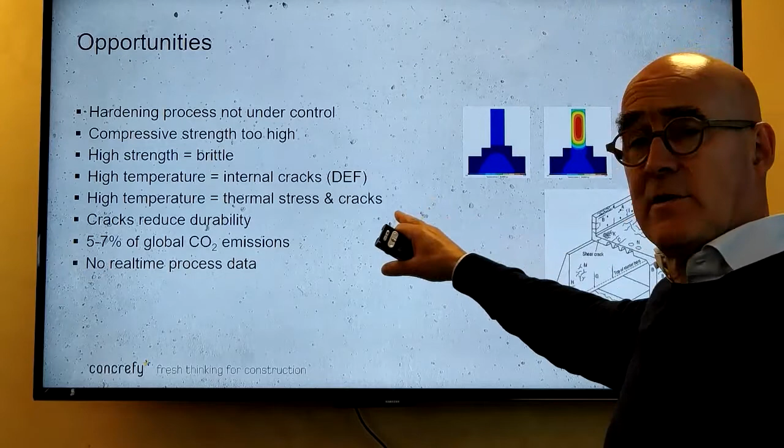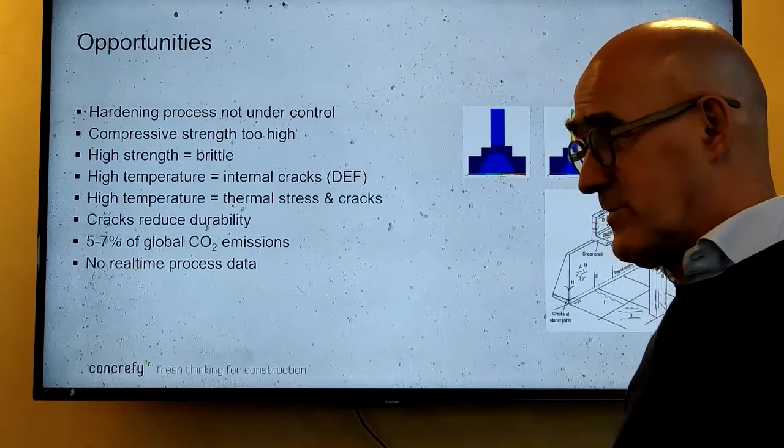But high strength automatically means brittle, and I would like to have a ductile structure. High temperature means internal cracks, delayed ettringite formation, and that kind of damage mechanism. High temperature also means thermal stress and cracks. Cracks reduce durability. And you have to see that in the global problem of concrete producing 5 to 7% of global CO2 emissions.

So the concrete industry is responsible for 5 to 7% of global CO2 emissions. We really have a challenge—it's not a problem, it's a challenge. And we don't have real-time data.

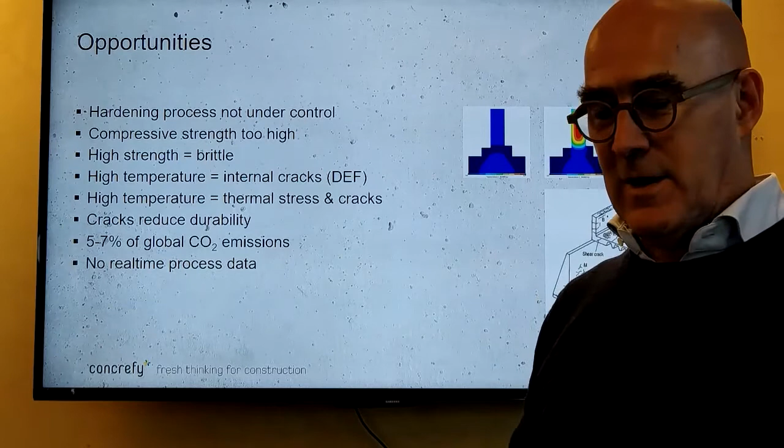So if you put that together, to me it's quite simple: develop intelligent concrete and repair solutions or whatever, and at the same time develop sensing. Make sure that it works on a portal, on a global scale, in real time, and you can help your customer and implement all your new technology in this traditional industry.

Some last words of wisdom to the group? Well, first of all, I hope it was nice for you, because this was an alternative to a tour through our lab. If we went through our lab, it would be much more appealing, I guess, and that's the reason we just did it as an interview.

Yeah, and you miss out on the coffee and cake now. The coffee and cake—we'll do that another time, after Corona, post-Corona time. But yeah, well, as a resume...

And we are convinced that if you want to change the world, if you want to improve the industry, you have to transfer from reactivity to proactivity. So help the customers, help the industry, because they are working on their daily business. They don't have time and focus to adopt this new technology. We really have to help them and show them what the result can be. And that means that we ultimately have to focus on industrialization of the concrete construction industry.